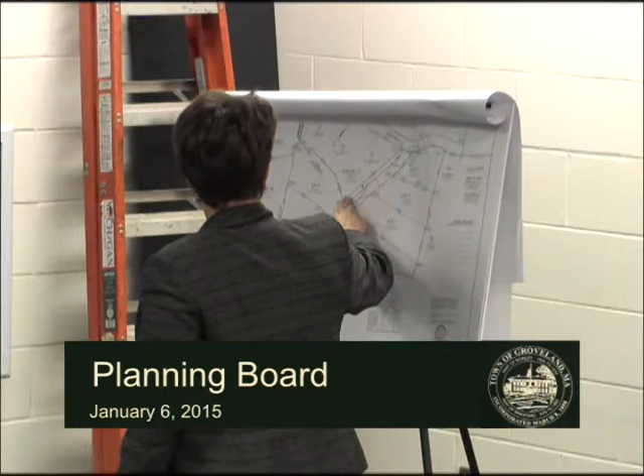This is being reserved as a buffer between this road and parcel A, and this lot off of Estes Way in that subdivision. So we'd like to keep that area not finalized and without a sidewalk along here, so the wooded buffer remains in place.

At this time, I think I would ask Taylor to go over some of the more finite issues in the subdivision plan, along with his responses to Peter's comments. Thank you.

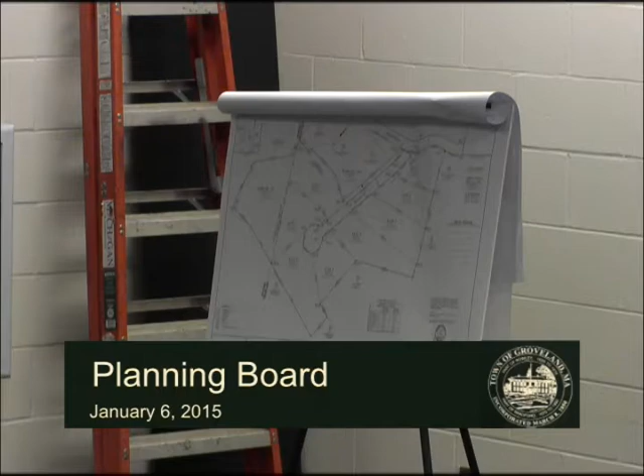First off, I will give you a written response for your record to Peter, and we'll go over them after I give a brief presentation. When you look at it, you'll see we've put Peter's comment in italics, and then in bold our response to them. For the most part, they were negligible items, mostly housekeeping.

Can we ask who Peter is? You can't keep referring to him. Peter Williams is... there'll be a full question and answer time after I present, but just to quickly summarize: he's the peer review engineer. What happens is, when we file, the board contracts outside engineering to review our work and make sure that what we're doing is accurate and meets all requirements of the stormwater regulations, other local, state, and federal regulations. So he's the peer review engineer for the board, Peter Williams, who works for the board.

Thank you, Lisa. My name is Taylor Turbide. I'm with Millennium Engineering, and we are the engineering and surveying consultant for the applicant, George Hazeltine. The property is currently owned by Mildred C. Esty Trust. Our client, George Hazeltine, is the applicant on the project, who currently has a purchase and sale, and has contracted us to go through the permitting process.

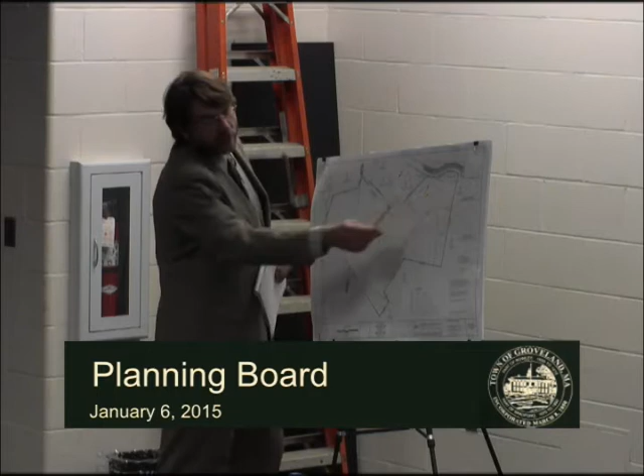The property generally, at the beginning, rises at between 8 and 12% slopes, a little ledgy up there, and then it drops off all the way to the back, anywhere from 8 to 20% slopes to the rear of the property. There are no wetlands on site, and none of the site is in the floodplain, which is unusual these days. There is a wetland body at the rear of the property where all the current drainage goes, and then ultimately to the Parker River, which is 400 or 500 feet from the back boundary of our property.

What we are proposing to do is bring a roadway in off of Estes Way, as shown here. Our proposed road will be 24 feet wide. We're proposing vertical, sloped granite curbing through a majority of the roadway. We enter the roadway at a 2% slope for the first 25 feet, and at that point we start to go into a vertical curve to catch up with the grade. The roadway descends at a 10% grade to the bottom of the slope to catch up with the existing grades, and then anywhere from 4 to 5% throughout the cul-de-sac.

All drainage is contained on the property, collected via a series of catch basins on the roadway, and at this point we are proposing to use a stormwater detention area at the bottom of the property, which will ultimately discharge to the wetland, where the water currently goes, so we're maintaining existing hydraulic patterns.

The roadway will create frontage for 8 new lots: lot 1, 2, 3, 4, 5, 6, 7, and 8. All the lots vary in size from 1 acre to the largest at about 1.8 acres. All of them have over 150 feet of frontage, as required per the regulations in the zoning district.

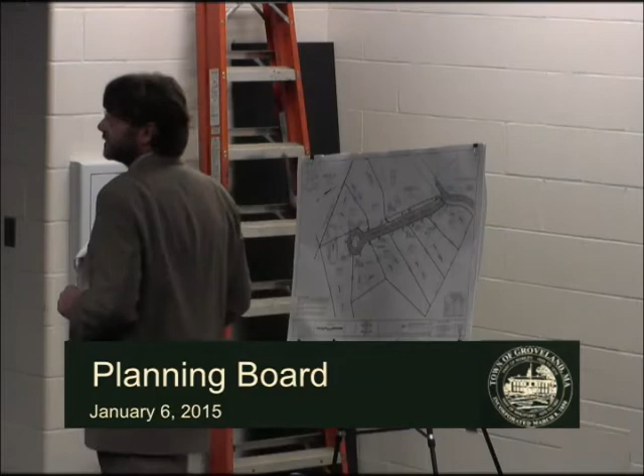The proposed water supply system was not shown in the original plans, as stated today. It still has not been sited, and the reason is your regulations call for the fire suppression system to be at the top of the roadway. This is a conversation we plan to have with the fire chief and the fire department. Estes Way currently has a dry hydrant and storage tank right here, at the top of our roadway. So rather than putting one at the top of the roadway as required, it's a conversation we'd like to have with the fire chief on where it would be more suitable to serve their needs for fire protection down the road. I'm presuming it will be somewhere towards the bottom of the hill, but I didn't want to make that assumption without first having that conversation with them. So that would be something we'd add in the definitive phase, including the exact location.

Line types for existing grades in the roadway profile were hard to discern, so that's been added for clarity on the plans.

This is again going through Peter's comments. The traffic memorandum, we briefly talked about that and the waiver request for that. So what we haven't done is provide travel speed measurements, 85th percentile speed, and actual on-the-ground measured traffic counts. These were established via state trip regulations.

Sections 4.3 and 4.371 require that the roadway be extended to the property line. The way I read this regulation, if the board sees that a waiver needs to be added, we certainly can. My interpretation is that's for future subdivision expansion. In this case, we're surrounded by the Parker River, and there's no way to access the site for future subdivision, so there's really no need for that right-of-way to be extended to the property line.

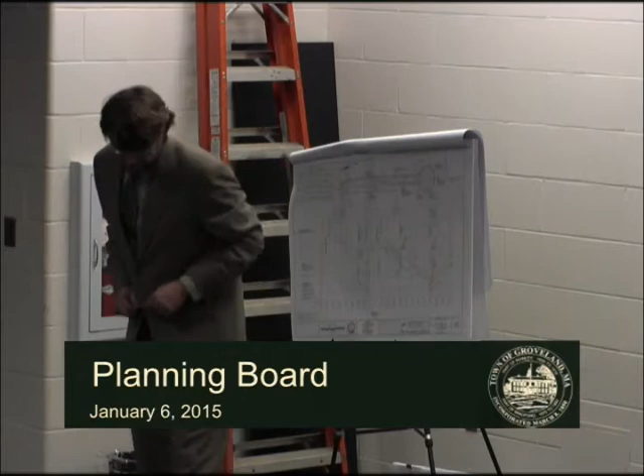Taylor, can you go to the original one you had up there first? The one when Lisa was speaking, or the one that I had? So that, the one that the review engineer had, I think it was number 8. So you're gonna try to get the new road to come out to Esty Way more on...

Like a T? Yeah, so if you look here, see how we curved in right at the last minute? That's just gonna rotate about 2 degrees, because the plans we got show it more like an off-ramp.

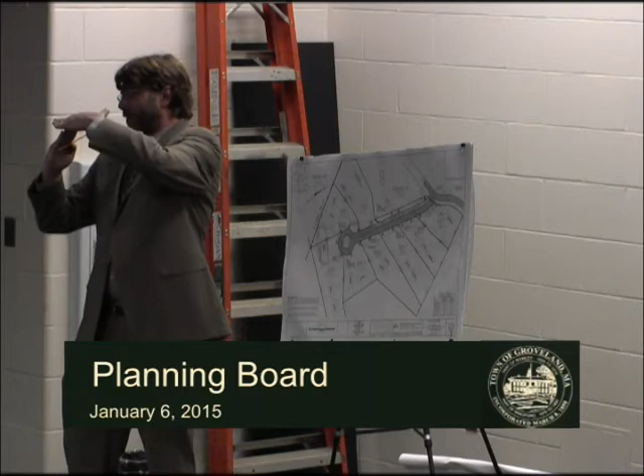That's when I say 70 degrees, so here's 90, your regulations required about right here. Right now we're about right there, we're about 20 degrees off. So that would be better, right? Absolutely, we're gonna bring it probably at least up to 75 degrees, maybe 80 degrees.

Part of the reasoning for that is to follow the grading a little bit, and that's why we introduced some of the slant. If the board would rather see it at a full 90 degrees, we can certainly do that. The idea with the angle is to reduce some of the cutting and things such as that. Just don't want the cars coming out...

Like a merge — and this is what it would be, to explain to the public as well. This is a big part of why we file preliminary plans: as we get into definitive design, things get a lot more expensive to design, a lot more time is put into it. So we like to flesh out these ideas and thoughts and comments and any consideration, and try to take as much into it as we can and come up with the best plan for everybody.

Is that an open air detention basin? This one, currently what we're proposing, yes.

And then also, when we do definitive design, our plan at this point, based on preliminary soils, is that any roof runoff will be infiltrated via some type of infiltration trench or something along those lines, similar to what we used at Groveland Fairways, if you recall that.

Why are you not using underground detention basins? What that would do out here is create large impervious areas underground, or you could use gravel I suppose, but it creates a huge storage area. Whereas this allows it to sit there and weep in. You don't have to worry about it because although we designed to a 100-year storm, quite often storms do exceed the 100-year storm, and that's why we have overflows. It's just a safer way to design it — it lets it evaporate, it lets it infiltrate, and what doesn't get taken back into the soil or the air is allowed to flow out.

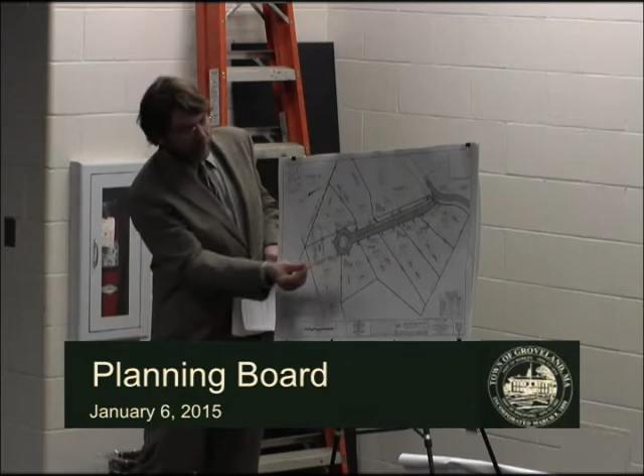So we won't be coming in at the steep slope that you spoke about. We'll be filled up as we chase it down the hill with our 10% grade until we catch up with it right about in this area.

And there would be, if there was blasting, pre-blast surveys done. Yes, that's something that would protect the owner. The blaster would be liable for it. The contractor owner has to do a pre-blast survey, has to work with the fire department, and has to have special insurance on it.

Not that they do, I'm not saying that. No, obviously we don't want anything to go wrong, but if it goes that way, the precautions are protection.

So would they send someone out to take pictures of my house? Yeah, they have to make sure an independent person comes out and does a survey of the house, the foundation, things of that nature. They're going to look at the location of the well, see the operations and things like that before they would do anything.

At this point in the preliminary stage, it doesn't appear as though blasting is going to be necessary, but when the definitive plan comes in, we're going to know a lot more information to be able to give you a lot more information about what's going to happen.

And that's what Taylor's suggesting, is that when the definitive plan comes in, the houses, the monuments, the wells, things like that are going to be located on the plan, so you can see exactly where that is versus where the construction's going to occur and things of that nature.

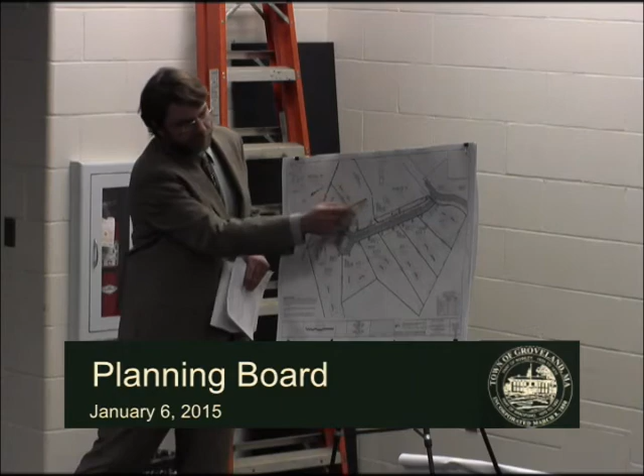There's an existing drainage easement that was part of your subdivision requirements. So they couldn't go through and plant in that area. Right, they can't tamper with that. But along the front, that's pretty much grown back over time, so for that portion, they would be able to have a discussion about it for sure.

It's certainly something that could work—maybe at the 15-foot setback line we maintain the tree buffer. That's why I'd like to make sure, I mean, if they're going to do the clear cutting and cleaning the area, and you're talking about replacing trees, we don't want trees that are going to still be growing in 20 years. We want a tree that's actually going to act as a buffer.

Yeah, I think it would help if you got Bill's house on that plan. Oh, his house is on it now, it's located right here. Is that it? I thought that was set. But what I was saying is it's not field located, it's traced in, plus or minus 3 or 4 feet, whereas we'll show it exact.

Yeah, in the future. Well, we don't have that yet. Can I ask about these plans—that was added per the comments.

How big is Lot 1, size-wise? Lot 1 is 43,560, so it's exactly an acre. I was wondering if that road could push over. No, we tried to push it over as far as possible without losing the acreage on that line.

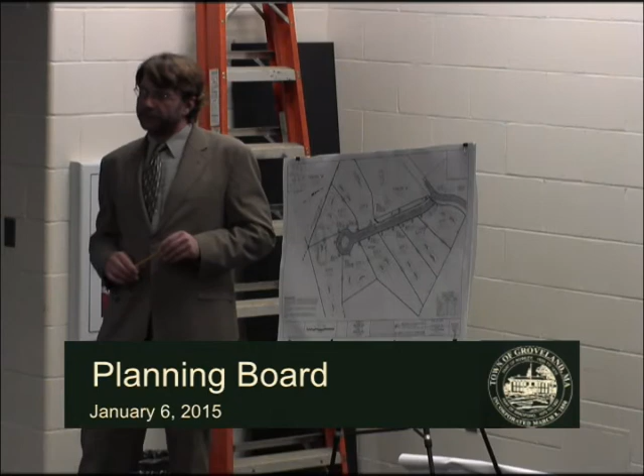Keep in mind, there's a 25-foot strip there, but that doesn't mean the road is at 25 feet—the road's another 7 feet over. So the road is actually 32 feet from your property line. The pavement of the road begins 32 feet from your property line. That strip I referred to as 25 feet, but then you'll see there's actually extra area between that invisible property line, which you won't see on the ground, and where the actual pavement would be.

I just want to make sure, because I've seen this happen before in many places—when it's time to strip the land, they strip it, the mature trees and mature growth are gone, and then we just plant some shrubs that we're waiting 20 years to grow. What would happen is we'll actually lay out silt fence so the contractor can't get in there.

That'll be staked out so there's a couple of things that'll happen on the definitive plan also. They'll probably mark the larger trees that aren't going to be taken down, so the board understands what vegetation is going to be left, and understands better where the placement of the required trees is going to go. And there'll be site walks, so if there are particular trees you have concern over, you can certainly point them out at that time as well.

I'm sure when you do a site job like this, is there a setup for rodent control and stuff like that, so I don't end up with a million mice in my basement? Absolutely, erosion control is one of the things—oh, you said rodent control, not erosion control. No, I can't say I have that, it's not my area. When you do a demolition of a house there's a demolition plan, but not on an open field.

I hear you have some aggressive coyotes around, maybe that'll be helpful. Yeah, we saw the news truck, let McDonald talk. Yeah, there's some coyotes out there, no doubt about it. He's been here a long time, that's all I can tell you.

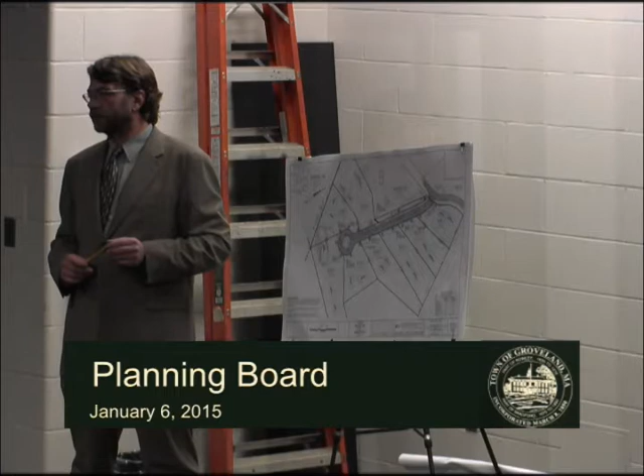When we went to the new street signs for 911, we did private ways too, one time. We put the new street signs on all the ways. So it was never an adopted paper street or anything else? It was not. That's what I refer to - we plan to have it accepted by the public, that's the difference. The public would have right to use it versus, sometimes we do these and we make them private so that nobody is allowed to touch them.

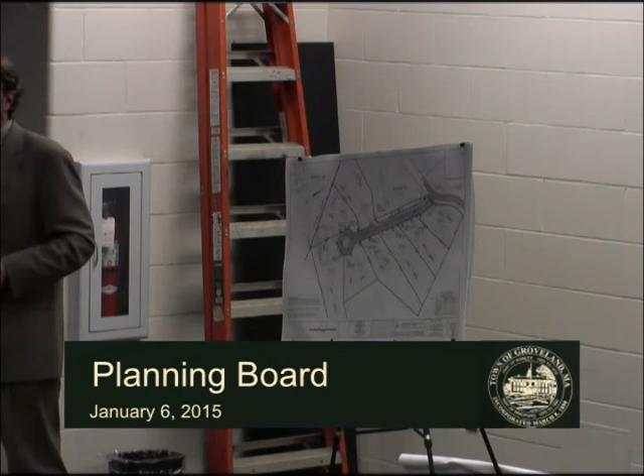I guess that's the only questions I have at this time. Thank you very much. One question, how deep is your well, and is it encased in bedrock? I don't know, I'd have to look at my original paperwork when I bought the property - they gave me the original info on so much water pumped in an hour and all that type of stuff. I'd have to look at that, I don't know what it actually says. I'd like to see that. Okay, all right, thank you.

I'd like to ask the board if we could just take a little break for a minute. Sergeant McDonald's been here for quite a while, his report is very minimal, and I'd like to get him on. Sure, he's been here since about 7:30, I believe. Does he need to be here? Yes. Sure, okay, thank you.

Come on up. Want me up here, the mic? Whichever, used to microphones today apparently. No, you can tell us about that one too.

Coyotes are in Groveland, just in case anyone had a question about that. I was told to come here tonight just in case anyone had any issues or questions about the special requirements for registered marijuana dispensaries.